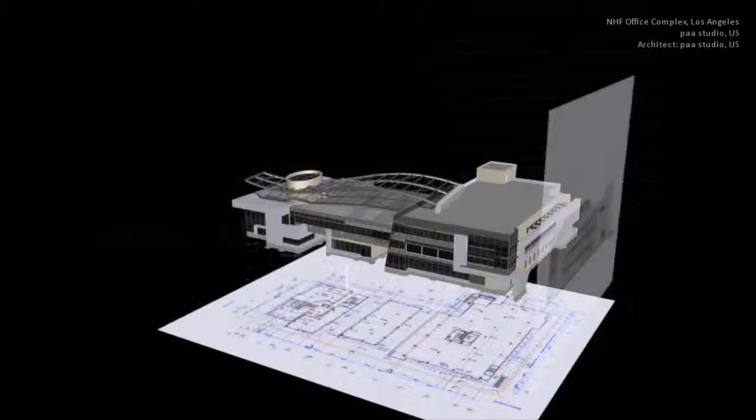Since its very first release, ArchiCAD has been all about BIM, Building Information Modeling, also known as the virtual building. Indeed, since 1984, the core of ArchiCAD has been the three-dimensional building model.

If you stand in front of it, you see an elevation. If you slice through it, you see a section. And the floor plan is basically a horizontal section.

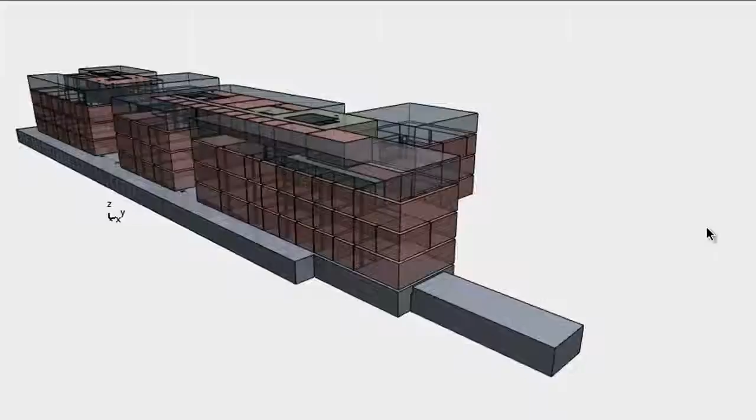But there's more. When you work with BIM, your data is always up to date. You always work on the model itself regardless of where you're working, on the floor plan, in section, elevation, or even lists, which are simply different alphanumeric views of the building.

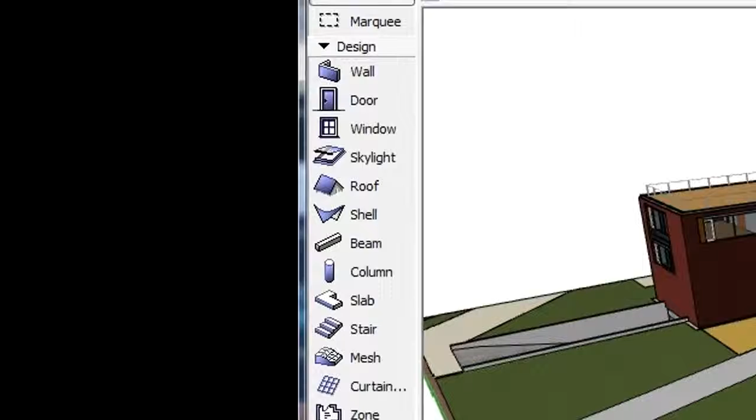When you work with ArchiCAD, you use construction elements. That is, you create your model using virtual parametric structures like walls, slabs, columns, beams, windows, doors, and zones. And since we are in a model, the structures are always displayed according to scale. You build one-to-one. ArchiCAD creates the plans for you at the desired scale.

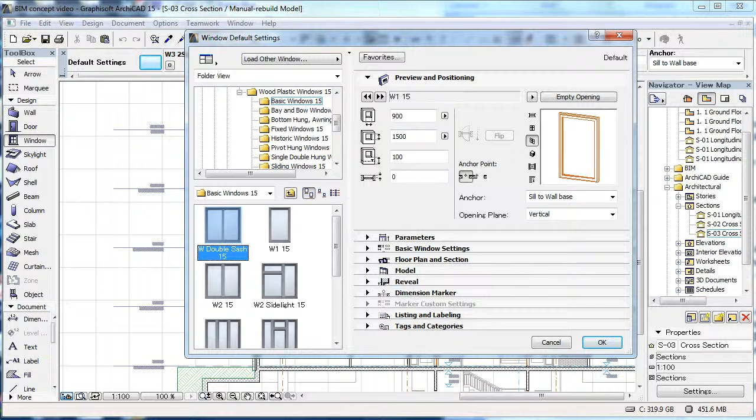In addition to standard elements such as walls, slabs, and columns, you also have access to comprehensive libraries containing parametric objects, which you can tailor to your preferences and requirements. Apart from the objects available within ArchiCAD, you can also access libraries from the Internet.

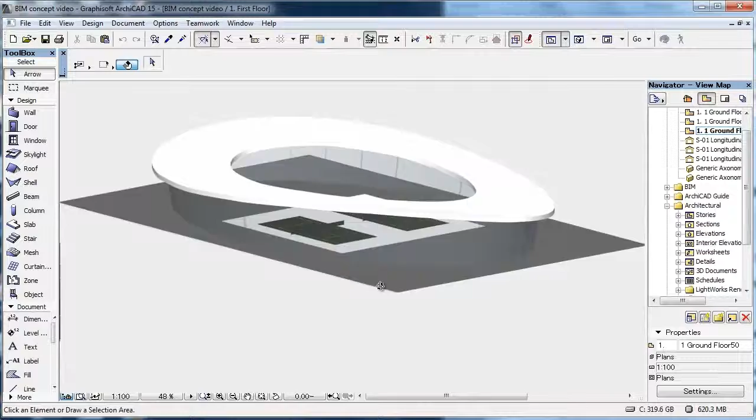And with ArchiCAD tools, such as the Shell tool, you can also create free-form organic shapes, which are still genuine construction elements, with the correct floor plan display.

Like any building, the ArchiCAD model is divided into stories. You can use the navigator to switch among these. And if you want to see another view at the same time, for example a different story or an elevation, you can view them on a trace reference.

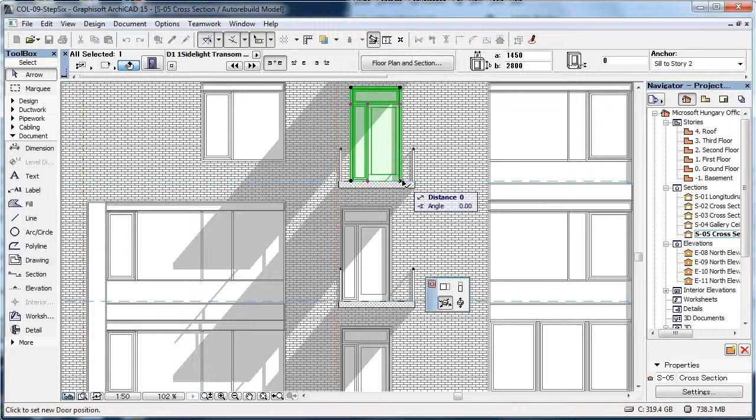With the help of the Section tool, you can create a section at the desired position. Since this is a model view, you can work directly on the model from here, just like on the floor plan view. The same applies to an elevation.

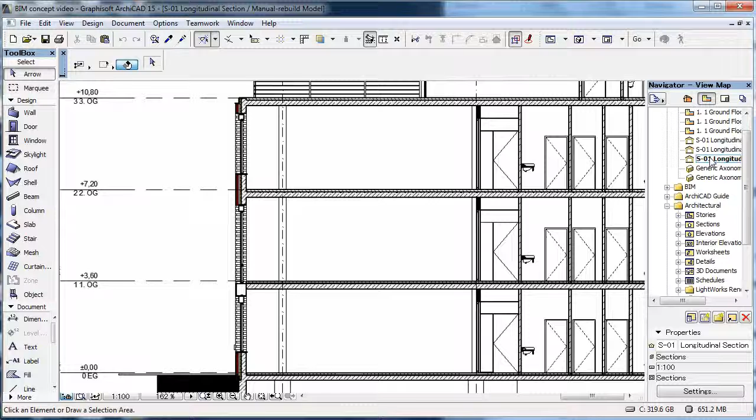You draw the elevation line, and ArchiCAD creates the elevation view based on the model. Since the ArchiCAD model is based on construction elements, the sections and elevations are, like the floor plan, scale sensitive. And by managing layers, model view, and structure display options, you can always display the model in the desired form.

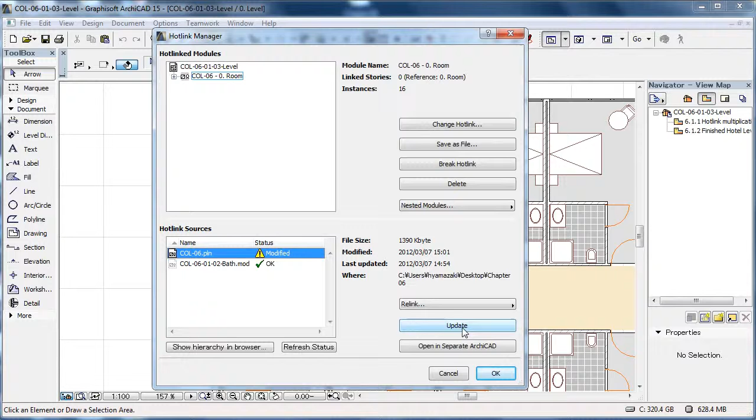Often, you will need to use repeated building structures. For this purpose, ArchiCAD offers modules, which are placed in multiple instances but refer to a single source. If you change the source, all the placed instances will change too.

Not everything can be displayed in 3D, so naturally a detail tool is also available. Here you have all the 2D tools at your disposal in order to fine-tune the details based on your building information model. In the case of a basic change in the model, the detail can be quickly rebuilt to reflect this change.

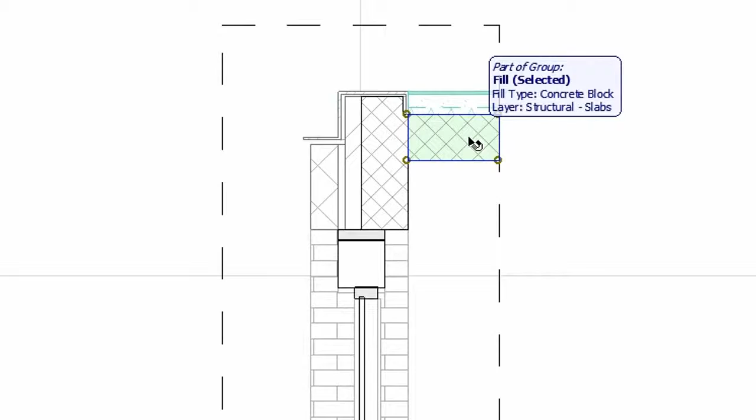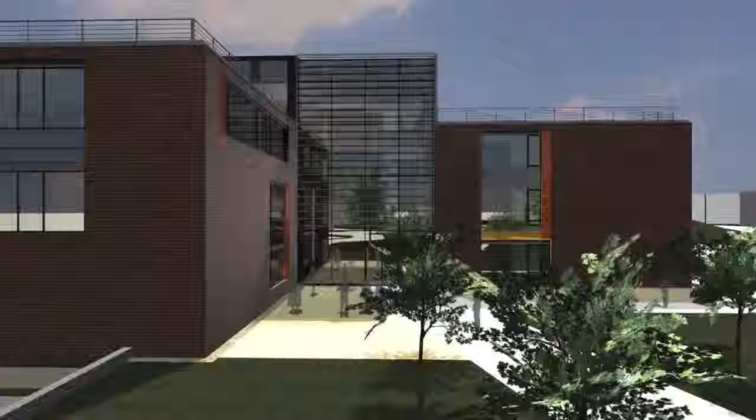A CAD solution always includes a rendering engine as well. With the built-in Lightworks rendering engine, you can create high-quality renderings with soft shadows and reflections. And other common 3D programs can be reached through interfaces such as 3ds.

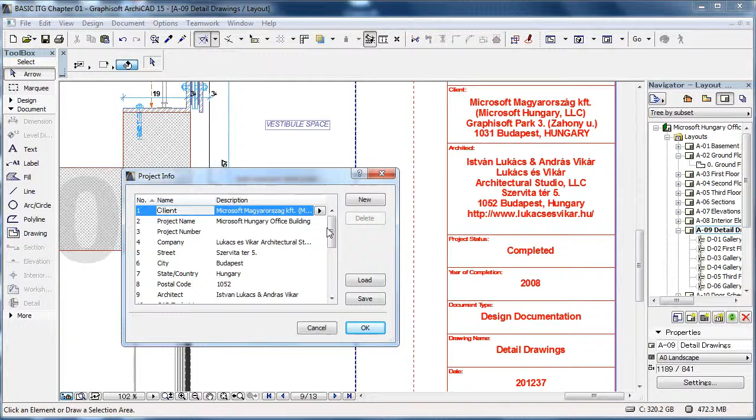Of course, at the end of the day, you must produce documents. In the Layout window, just drag all the desired views onto the layout sheets. Here, you're supported by a number of automatic features, like automatic drawing placement, new layout creation, and auto text for annotations to help you do the job quickly and reliably.

And since there's more to life than printed documents, your CAD program must also interface with other programs from other disciplines. ArchiCAD supports interoperability with formats such as DWG, DXF, and PDF for daily data exchange.

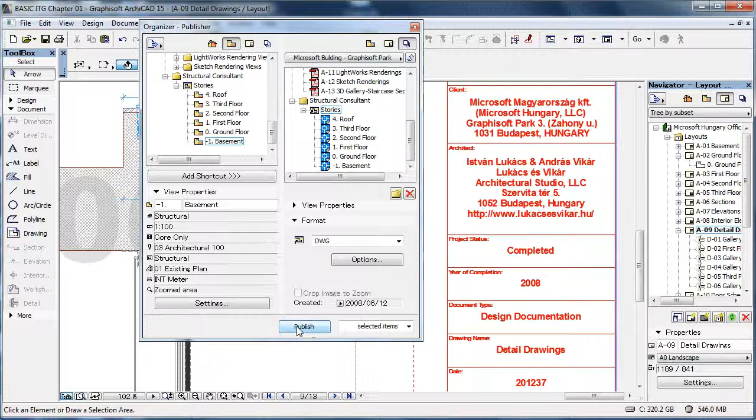All documents are published through the automated publisher. Once defined, a publisher set retains all the publishing properties, so you can output a new set of data at any time without needing to input these properties again.

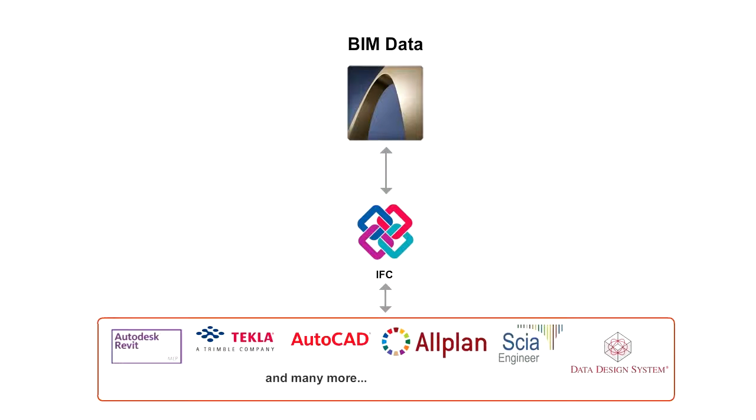In addition to 2D data, you can output the 3D model as well, for rendering purposes or to exchange project data with other disciplines. For 3D model exchange, the IFC format is used.

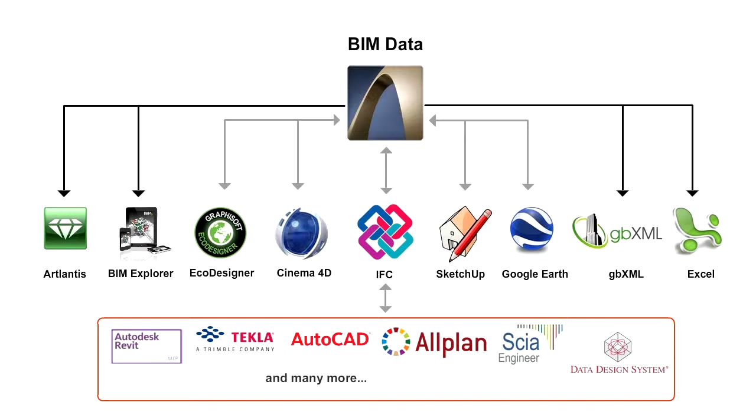With IFC, the complete building, including the intelligent structures, are shared, so that a consultant who imports the project receives real zones, walls, windows, doors, slabs, and beams.

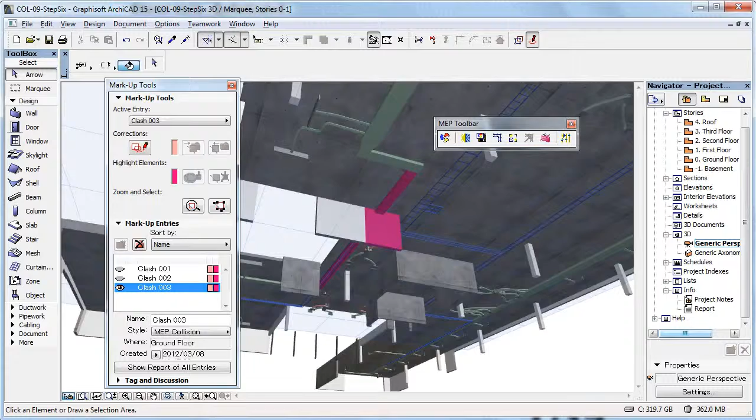For example, if your MEP consultant is also using a BIM-compatible program, you can import the MEP data to ArchiCAD via IFC and discuss necessary wall or slab penetrations or carry out collision detection. This way you can solve any problems during the design stage instead of on the construction site.

Collaboration on projects, both within the office and with external colleagues or consultants, is increasingly important. ArchiCAD's Teamwork is the only out-of-the-box client-server solution. The BIM server, a database server application, manages the BIM data and the access to it.

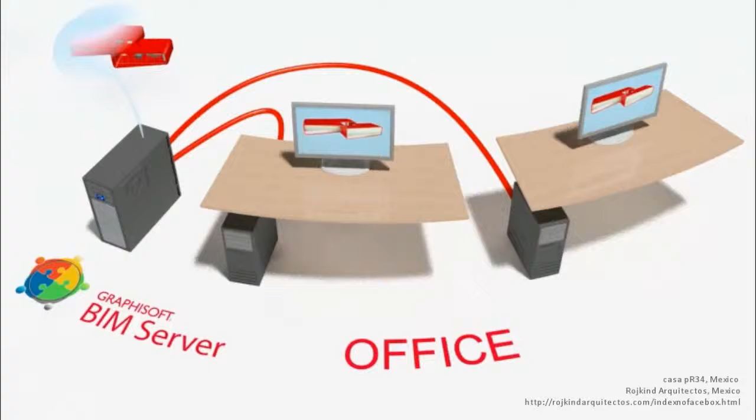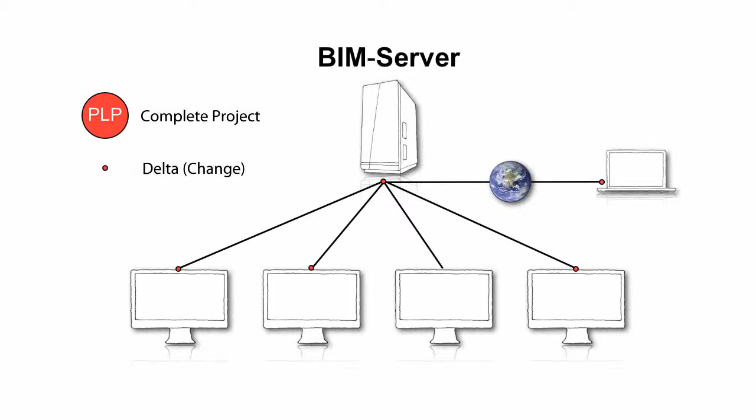All Teamwork users can access the BIM data according to defined roles and rights, so they can work together on the same project. With the Teamwork Delta server technology, only the modifications to the project are sent to and from the BIM server, not the entire project, so send and receive operations take only a few seconds.

All reservation information is always up to date. You always see which user has reserved a given element. If you need an element that's reserved by someone else, you can simply request it through the built-in messaging system.

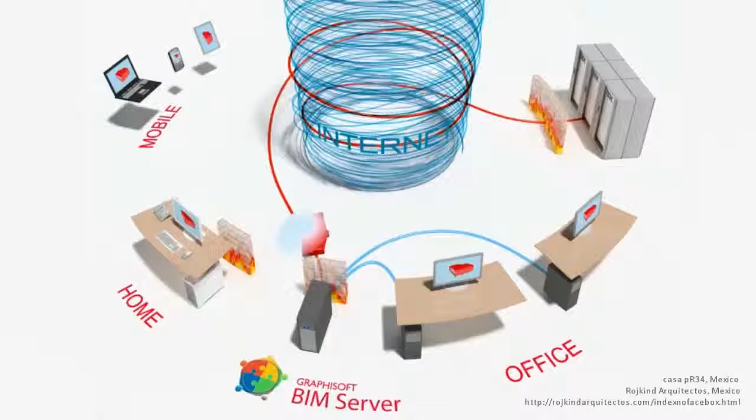All users can access the most current version of the project. To use Teamwork, you don't even need to be in the office network, because the BIM server is also accessible over the Internet. This way, external consultants can also access the model.

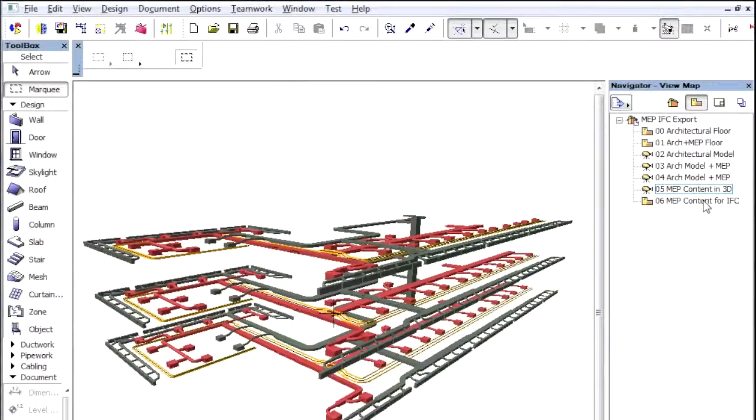A wide range of complementary programs and add-ons are available for use with ArchiCAD. For example, EcoDesigner for energy evaluation, MEP Modeler for coordination with MEP engineers, and BIM Explorer for a walkthrough presentation of the building model. You can view the resulting BIM Explorer model on other computers without the need of ArchiCAD, even on an iPad or iPhone.

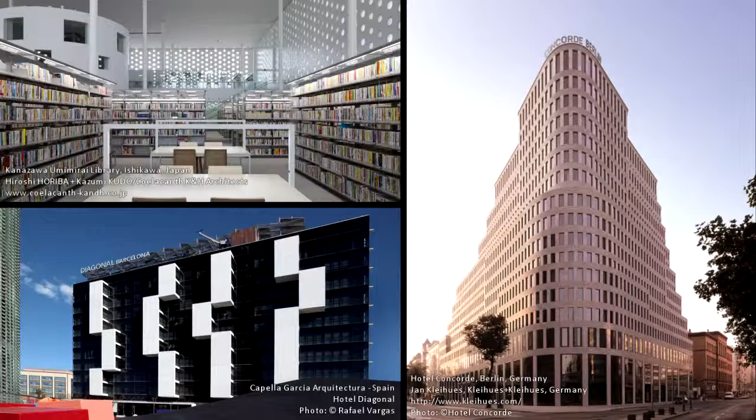Graphisoft continually strives to provide the best standards of performance. ArchiCAD is available for both Macintosh and Windows. We also support the latest technologies such as multiprocessors and provide native 64-bit versions on both platforms. ArchiCAD is a mature program that stood the test of many real-life projects, both small and large, with great success.

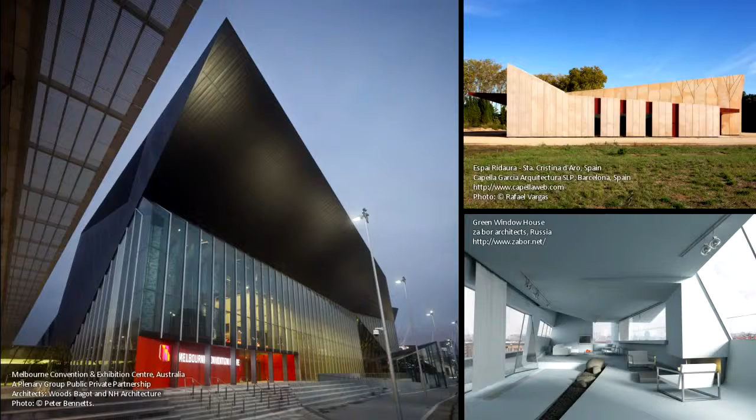BIM technology, the core idea of ArchiCAD from day one, supports you in your daily work, helps you get the job done faster and more efficiently, and enables you to work as effectively as possible in the design phase.